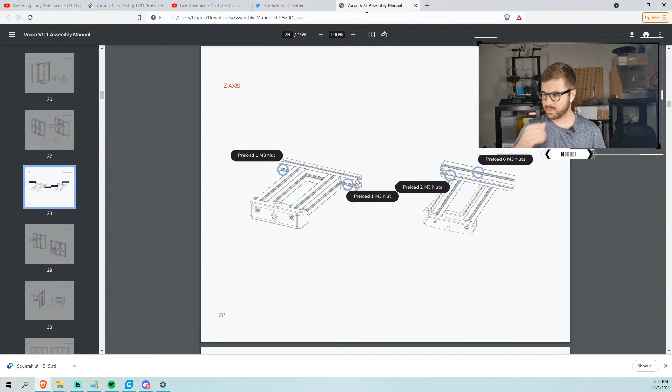All right, we should be good to go. So the portion we are on now is close to here, but not exactly there. So we're right here - we are going to be attaching basically the bed mounts to the Z linear rails. And I mentioned that it says apply thread locker. All I have is Loctite, and Loctite and ABS do not play nicely together, so we are going to skip that, which should be fine.

The bed or the Z doesn't really get a whole lot of momentum - it's moving very slow in comparison to everything else, so I don't foresee it being a huge deal. Worst case scenario, if we have to in the future, we can revisit this. Once this is fully built and assembled, we might be doing a mod to the bed where we're adding a belted Z instead of the lead screw. So at that point, we could come back when we disassemble and add that on. But for now, we are going to just attach. So we need the two printed parts, which we have out, and then M3x8 socket heads.

So let's go ahead and go to the side cam, and we will get these going. Let's see here. I'm gonna start off by just kind of trying to align everything nicely.

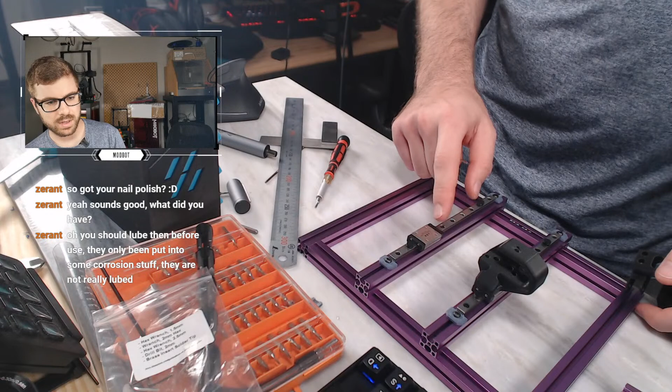It is much easier to do it now than take it off later. I'm going to lube them once it's all said and done. The instructions basically state that they use stainless steel linear rails, so they're much less prone to rusting, but they are good to go. Once this is all assembled, I'll go in with my fingers and get some lube, or I have some 3-in-1 oil I usually use a lot of, and that should do the trick. You definitely want to put something on them, because otherwise they can still corrode.

All right, so let's go ahead and get this other piece on.

What time is it where you're at, zerant?

This is the same one. So with this one too, you also need to drop the bolt into the hole. I'll show you that again. This one's trickier to get in. Let me see, I think I got it. Then you basically use the Allen key through this tiny little hole, and that's how you access the screw.

Knock on wood, so far so good, and I know we still have a lot. The rails are stainless, but the balls.

Gotcha, 11:40 p.m. I guess I would normally be up at 11:40 working on projects anyway. Are you normally up this late? I feel like I'm trying to get a little better as far as my scheduling goes with time, but it's pretty common for me to be up working on stuff until...

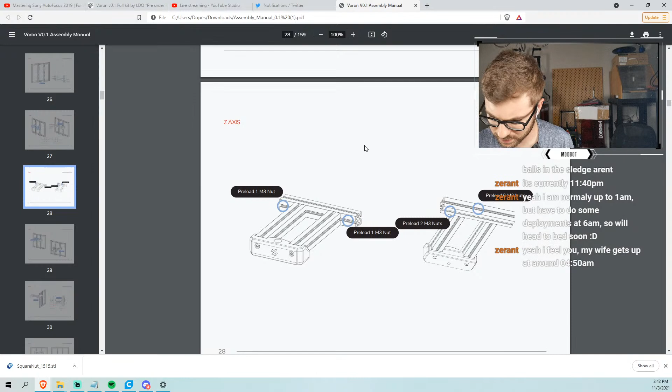Next, we need to do some preloading. I'll show this so anyone that wants to see it can. So we're gonna do one here and one here, M3 nuts.

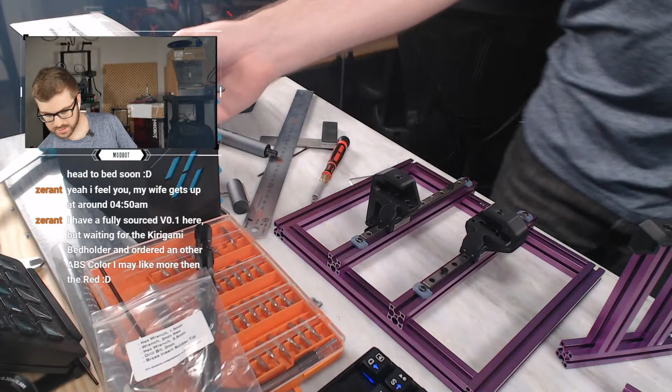Those kind of slide a little. It's funny, some of these nut traps are really loose and some of them are really tough to get sliding. Like this one's way tougher.

I have a fully sourced one, waiting for the Kirigami Bedholder. Oh nice, and I ordered another ABS color I may like more than the red. What's your plan, are you doing black as your primary and then a different color for the accent?

Okay, so we did one here and one here. Then on the back side, we need six here. So let's do it, it's a lot of nuts.

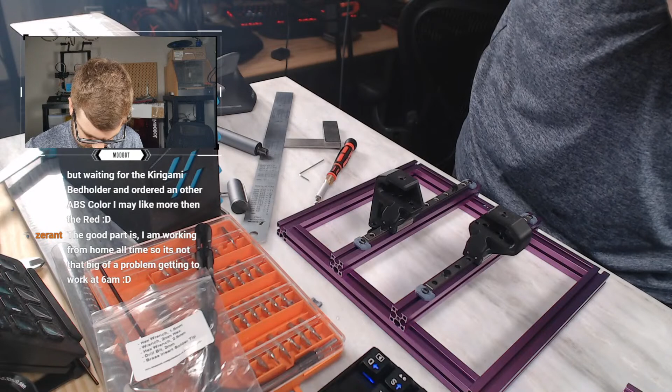The good part is I'm working from home all the time, so it's not that big of a problem getting to work. That's true. Yeah, when I was working and we went into lockdown over here.

Oh no, I broke it. Good thing I got a ton of them.

I loved working from home. I'm a fairly, I would say I'm definitely a people person, but I also just like being alone with my projects. The combination of doing all the YouTube stuff and working on projects kept me pretty happy. And so the idea of just being able to roll out of bed and start working is definitely nice.

I need to build one of these using Sparta's. Dude, Sparta 3D makes some of the most beautiful ABS I've ever seen. With how popular Vorons are now, I'm really surprised there's not more manufacturers making crazy colors for Voron builds. They're like the main one that I've seen.

Okay, so we loaded six in the back, and then we also need to do two down here on the bottom side, and the bottom side is where the small hole is. So you've got a big opening, and that's the top, and then the bottom side is right here, little opening. So we need to slide two nuts into here, and that should be it for the bed, I think.

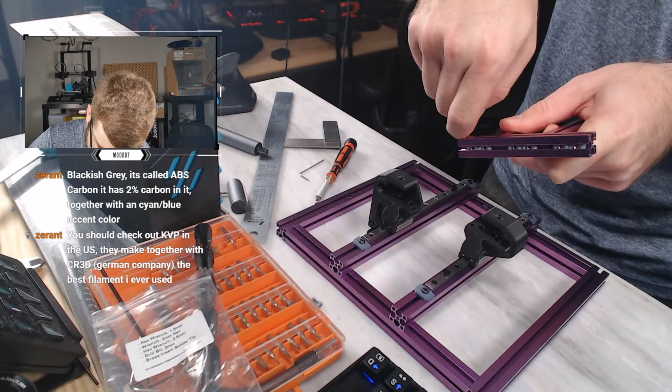Man, this is tight. Oh shit, I almost popped it out. Okay, so nothing fell out. So we've got, again, one, and camera angle, one, then we've got six in the back, and then we've got two in the bottom, and that should be everything.

Let's see, blackish gray, it's called ABS carbon. It has 2% carbon in it. Ooh, that sounds gorgeous. Yeah, this is just carbon ABS, but in black.

KVP I've actually used, they make together with CR3D the best filament I've ever used. I've used some KVP too, definitely anodized aluminum. You only get so many colors right now on the market. Yeah, that's true. LDO has quite a few different options for their kits, but it's still limited compared to the grand scheme of things.

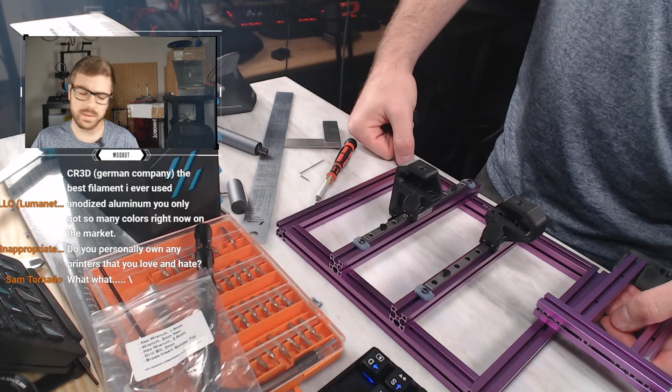Do I own any printers that I love and hate? I love my Voron. I mean, there's a lot of printers that I like, I guess. Like the Ender 3 was the stepping stone for me, between like, okay, these cheap printers can actually be pretty decent. I've got the FL Sun SR, which has been an awesome Delta printer, definitely my best experience with a Delta, that I will be installing Klipper on for a video just to see how fast we can push it speed-wise. I know that Teaching Tech already did the firmware, so the swap should be quite easy.

I'm trying to think what else. I mean, there's a lot of printers that I like, right? I've been using the CR-6 SE a lot, which I like. The Viper from Anycubic's been great, I like it. But love is a different thing to me, it's a little bit more, like I love the Voron 0.1 because I spent so much and put so much time into it, and it's such a unique printer. While many of the other printers on the market are great, and they check the majority of the boxes that one would want, it's still just another 3D printer, whether it performs well or not. Most of the printers lately that I've gotten or tested out on the channel have performed relatively well, where I'm like, yeah, this passes the test.

But yeah, when you say love, it has to be something special. For me, the Voron is probably the main one right now. Delta is really cool too. The Ender 3 I have with the Micro Swiss direct drive has also been really solid, I've done a lot of different filaments through that. That's a tough question, but the Biqu B1 has been awesome. I really like that printer a lot as well.

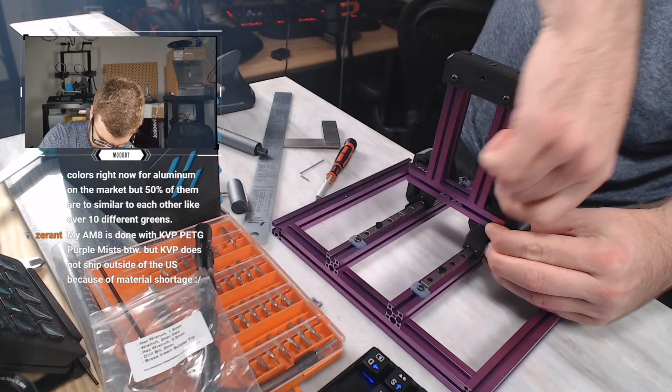All right, let's do that. Okay, so we are going to, hopefully nothing falls out. Oh yeah, okay, so that's what these nuts are for. We need to line these up. Let me see here. As long as you have them kind of lined up, you can stick your Allen key through and sort of move them depending on how freaking stuck they are. That one's good.

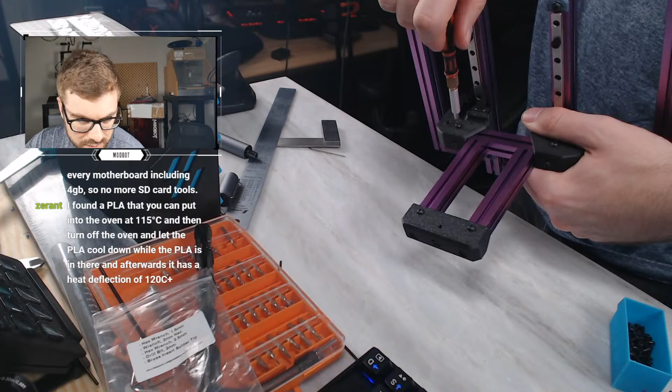I found a PLA that you can put in the oven at 115C and turn off the oven and let the PLA cool down. Yeah, so you can anneal PLA. The biggest issue, there's a lot of PLAs that you can actually do that with, but the biggest issue is warping. A lot of times they warp when you put them in the oven because they hit a certain temperature where it softens. So I've seen things like, okay, now we're going to install 1, 2, 3, which is in between this, and then 4 on this side. There's things you can do, like put it in kind of like a bowl with sand, and the sand should help keep everything compacted and in place. But I think the biggest issue is with the warping side of things.

Like I know Tom did a video where he printed with HTPLA from Protopasta, and he did an espresso cup and it worked, but the espresso cup definitely warped. It wouldn't be consistent enough. Yeah, even regular PLA can warp. Most thermoplastics, I believe, can be annealed.

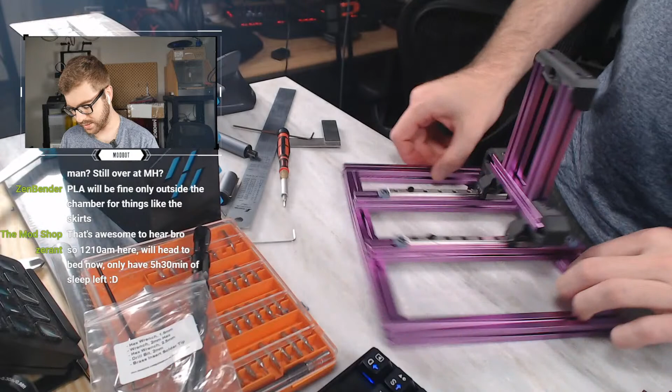PLA will be fine, only outside the chamber. Yeah, I think too, for kind of cosmetic things. Well, the bed is, I mean dude, the bed is sliding really, really well. Okay, preload nuts. Make sure the 2 preload nuts are located in the center.

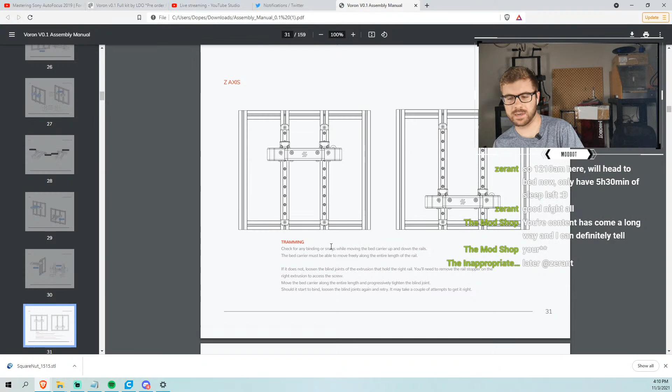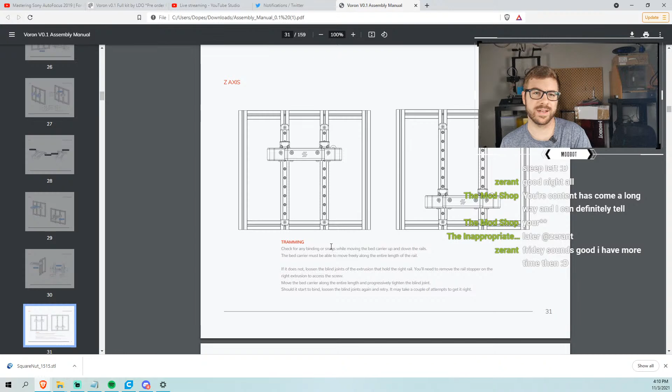Thanks, man. I've been little by little trying to make the content better and better. If I look at my content week to week, I don't see much difference, but year to year I can see it's come a really long way. The way I do things now is completely different. Before it was all off the cuff, and now everything is scripted to an extent. I type up everything for every video, like 3 or 4 pages, but I don't use a teleprompter. I basically look over at the next paragraph, get all the things in my head that I want to say, and then go for it. My personality is very ranty, which is cool for hangouts and streams like this, but for the sake of my videos on the main channel, I really wanted to tighten things up. Based on feedback I've gotten and the channel's growth, that's worked out. So I'm really thankful that there are people who come back, learn, watch stuff, and want to hang out. It's been crazy, man, a wild ride. I've been on YouTube for like 9 years now, so it's just crazy.

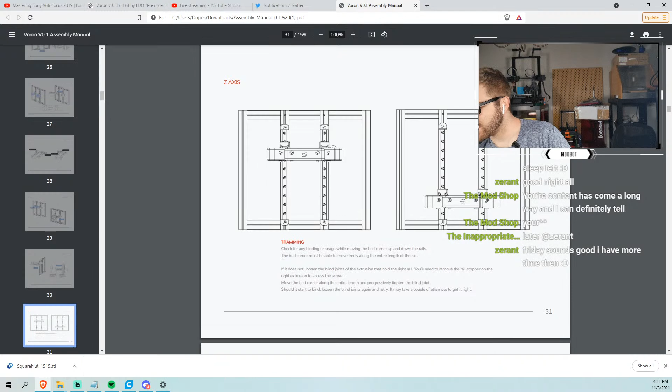Okay, so the next thing says tramming: check for any binding or snags while moving the bed carrier up and down the rails. The bed carrier must be able to move freely along the entire length of the rail. If it does not, loosen the blind joints of the extrusion that hold the right rail. You'll need to remove the rail stopper on the right extrusion to access the screw, yada yada yada.

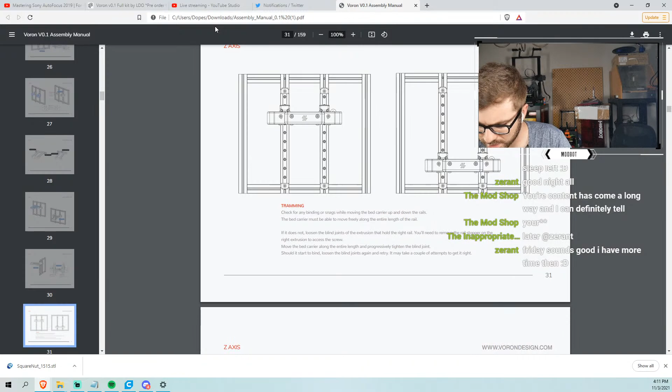I just realized I did something silly, I think. If it does not loosen the blind, bed carrier alignment. Okay, so yeah, I didn't tighten these completely because I knew I probably was going to have to tram this. But taking these little guys off now, be careful doing so, because if the linear rail pops off the end, that's no bueno. Basically I just want to move this up and down, and it's going freely because these are not tightened. So we're gonna go back.

We are going to go back to the page that tells me, so 58 millimeters again. We're gonna tighten up, let's see, 58. I actually need to slide the entire gantry now. Let's see.

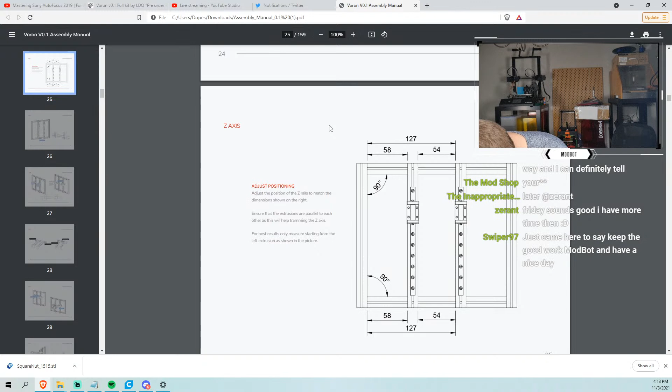Okay, we've got 58, let me show you guys this. So I got 58. Basically from the end of here to this inner lip, it needs to be 58 millimeters. So I've got that. Now I'm going to use this guy, insert it through the hole, and I'm going to tighten this completely now.

And then we are going to do the same for the bottom. So 58, which it is not even close actually. It's about 59. Pretty much right where we need it. Go here. Okay, 58 millimeters on the money.

But I goofed. Because I installed this little guy right here, the stopper, I have to take it off. I just got the steel ruler, it was actually a gift, man. So since I'm taking this off, if you are taking these off, be very careful because this can now pop off. I said earlier on stream that there's a couple things that you get, if you're a maker or into 3D printing, that you don't really know how you lived without, and that ruler is one of them.

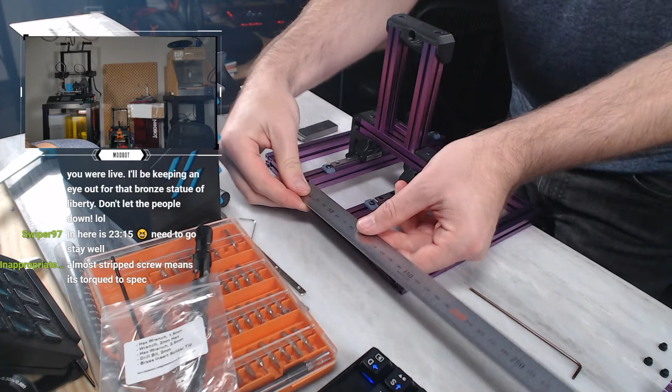Ooh, this is buttery smooth. That's what we like. All right, so we need 54 mil from one to the next. Let's see, which is not what we've got. It's like... yeah, they're both a little bit too far away. It's like 54 and a half. And this one is... I think that's pretty damn good. That is what we like to see.

Almost strip screw means torque to spec. Exactly.

Oh man, yeah, it's almost midnight there. Get some sleep, man. I'll be back on Friday, and we'll start streaming 4.5 hours earlier than it is right now, so that'll be 4.5 hours earlier than 7-ish your time, which is a lot better.

Okay, so we are tightening this guy. I know on these, because I'm not using... yeah, let's tighten it nice and tight. That's good. Ooh, yeah, that's nice. Okay, let's take off this guy so we can tighten the bottom side of this rail, and then we are done with this portion.

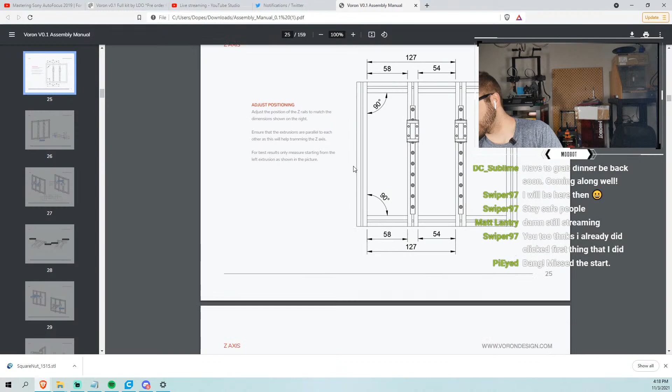Let's see, screen share. All right, so we've got the distances correct. We checked that there's 90 degrees. We installed the stoppers, we installed these portions, we preloaded everything, we attached everything, we mounted everything, we trammed everything. Now we are here, which...

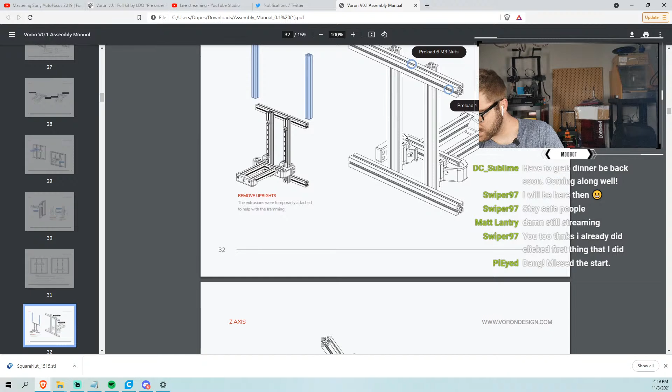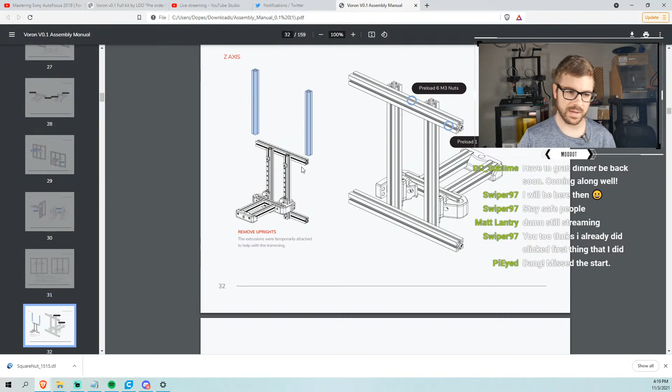Wait. Oh yeah, it says take these off. They were temporary, that threw me off. I was like, wait, why do we already have extrusions here? Okay, so these side extrusions, this one and this one, were only here to help us tram everything, and now that that's done, we need to remove them.

So I am going to... actually, let's use the long side to try not to strip these screws. So just 2 turns basically is all we need, and then it should be able to slide. Yes, excellent. And we will do the same for the other side.

Man, this makes me want to play. So a little side story while we're building this: like I said a moment ago, my channel, Modbot, used to be a video game hacking and modding channel, and part of that process, I fell in love again with retro cartridge games, pretty much everything from NES and up. So hearing this just makes me want to play some games.

Awesome, so this is good. We've got the side panels off.

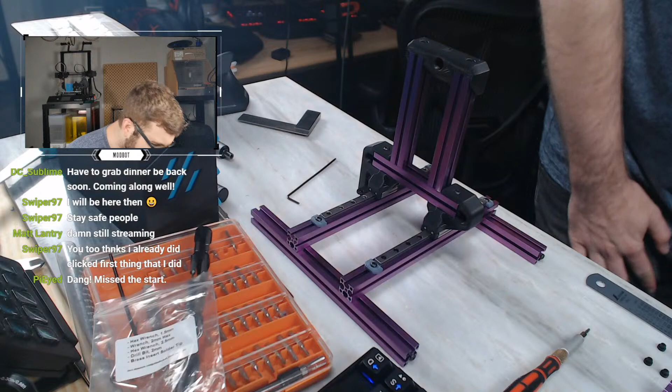Pi, what's going on? You too, thanks. I already clicked, first thing I did. Thanks, man, I appreciate it. Were you here earlier, Pi? I don't remember seeing you in chat. We started streaming actually like 4.5 hours ago, and then we streamed for a couple hours and had to take a break because I got hungry and the music wasn't working. And so we're back now, and the goal is to finish the frame.

So the next step shows we need to preload some more nuts. It looks like from the back side, like this, right? Yeah, we need to load 6 on the top and 1 in the back. So let's do the 1 first. Side view, so 1 in the back, which we'll go ahead and do now.

It's kind of loose, that should be okay. I just don't want it to slide out, that's my only concern if I tilt it, but yeah, it's still there. Okay, so 1 in the back and then 6 on the top.

Some of these are really difficult to get in, and I don't want to... the extrusion is tight, but I also don't want to put too much pressure on it. Man, there's a stuck one. Okay.

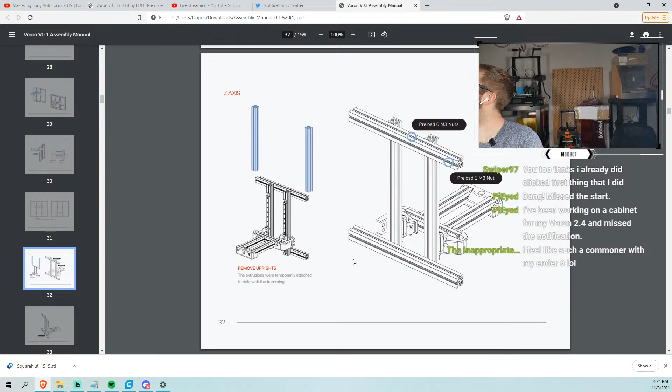We got all of those preloaded, which was this step. Take those off, we did. Preload those, we did. Preload 6 more, now on the bottom. So on this side, definitely don't want to miss any of these. I think Aaron's home. Maybe. Okay, so we did 6 on top, 1 on back, and now we need 6 on bottom, side.

I actually am, I'd love to test out an Ender 6. I have the Ender 7 sitting right over here in a box that I need to test out, but I'm also testing out a few other printers at the exact same time. So it's kind of on the back burner. But I had quite a few requests to test out the Ender 7, so I was very happy. It wasn't Creality that actually sent it to me. It was a seller, like just someone that resells them.

But I am looking forward to see what it's all about, because it is a Core XY. They do claim it has fast speeds. It's linear rail, or it has linear rails. I think it's Bowden. Yeah, that printer I'd like to test out, but then also install Klipper on it and just see how fast it can actually go compared to what they're claiming, which I think is like 250 millimeters a second.

You guys can see this, just making sure. Come on! Oh my God. All right, I'm gonna get a different angle. I'll show you guys after. This is ridiculous. Oh, there we go. You guys can see like that. What am I doing? This is way better.

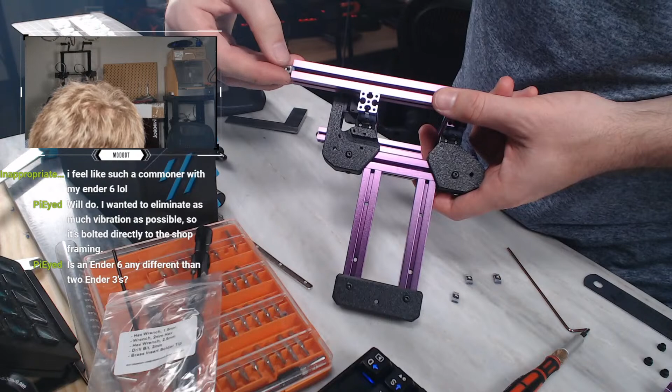Oh, there's so much crap around me. I hit my head on the overhead camera. We're gonna try to do the same thing where I'm gonna put 2 of them. Oh, Jesus.

Some of these nut traps are super loose and some of them are really tight. Okay, this one's loose, or at least this one's exactly how I want it, where it moves a lot easier, but some of them are really stuck. So we're gonna do the same thing, which is basically 2 in the center and then 2 towards each edge. Cool, cool, all right, easy.

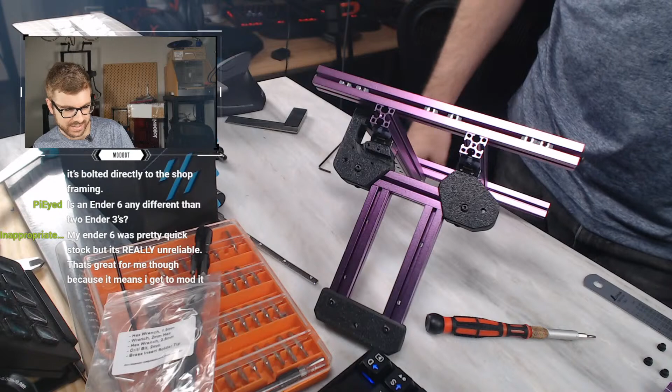Is Ender 6 any different than 2 Ender 3s? Ender 6 was pretty quick stock, but it's really unreliable.

That's great for me though, because it means I get to mod it. I think that was like finding 3D printing, because when I found 3D printing, I was heavily in the PC modding stuff still. And so finding it was like, cool, now I can make custom case mods and custom fan shrouds and stuff. But then I got obsessed with modding 3D printers and all that came along with them. So yeah, 3D printing just clicked, it checked all the boxes. And because there's so many different machines and so many different filaments and firmware stuff and slicer stuff, it's just like I can't get bored of it. If all of a sudden I'm like, okay, well this is the same kind of printer over and over again, well I'm like, let's play around with firmware now, or let's play around with different filaments. So I love there's just so much. And then also it's just awesome.

Also, it's just awesome, all the crazy cool things people are doing with 3D printers. I love it, whether it's just fun hobby stuff or professional stuff for work, whatever, it's awesome.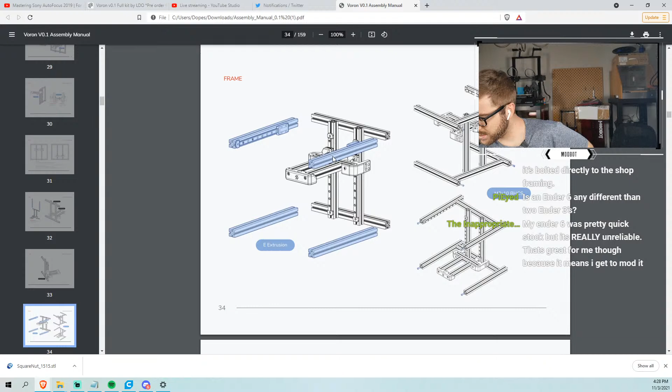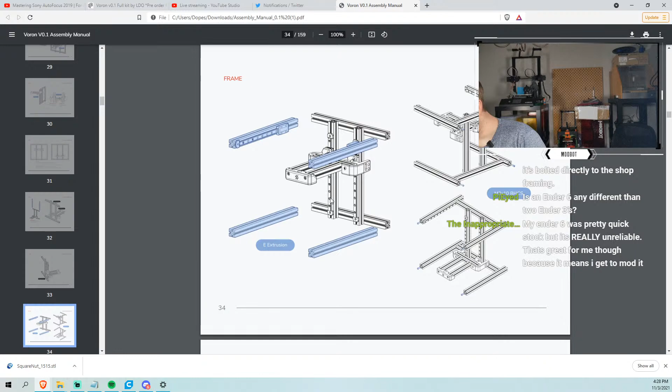Okay, so we did all the preloading, which was basically preload up here, preload down here, and now it's telling us to get E extrusions as well as these, which must be our linear rails from earlier. Yeah, these guys, which are the Y extrusions, or the Y linear rails. So let's go ahead and put these here. And then E, what do the E's look like? That's probably not the most effective way. Okay, so E's have one hole only, which I think are these guys. Yeah.

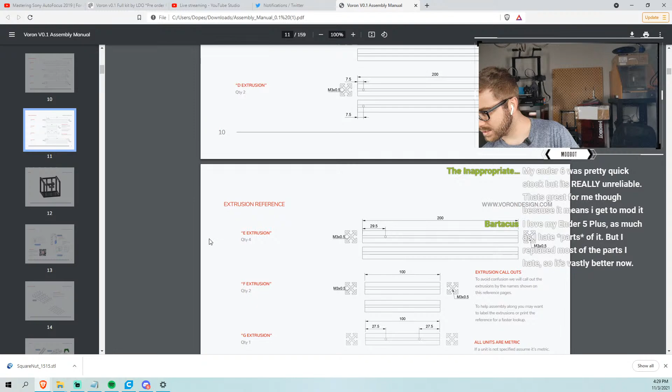I've had two Ender 5 Pluses that I had to get rid of just due to space constraints. They just take up way too much space in here. I talk about it all the time, but this is a tiny little one-bedroom condo, and it's me, a big lab pit dog, a smaller mixed dog, and then Erin. So I have to have a use for a printer or figure out how to make it work, which is why I've been trying to work with height as much as possible. But I really did like the Ender 5 Pluses I've gotten through. Yes, again, like you said, there's room for improvement, like with most of the lower cost 3D printers, but as a base platform, it's fairly solid in my opinion. I definitely don't mind the Ender 5 Plus.

Ooh, we are not that far, but we are getting close to that. Okay, so this is showing to slide. So I'm imagining, let's see, so this is the bottom, right? Yep.

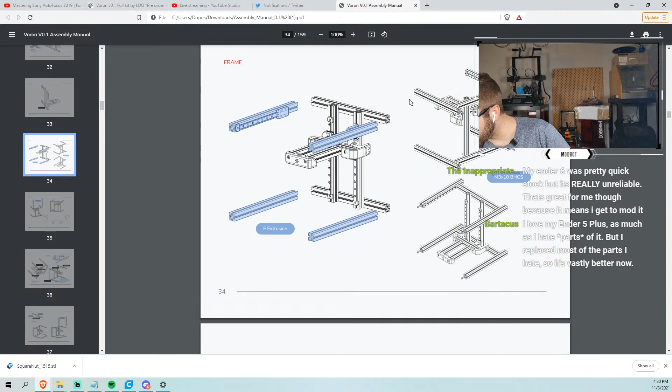Okay, so let's go ahead and slide. I don't know, it doesn't really tell me how far they need to be sticking out the backside. Like right here, they're all sticking out. So okay, let's go ahead and do this side. And then these holes, oh, that's okay, it makes sense now. These holes need to align with these screws. So we're just going to slide this guy, and then we are going to slide this guy. Okay, let me try tightening these down.

Let's see. And then I'm going to use the little, where's my machine? There it is. No, my square doesn't fit. Oh, I should be able to check the backside. Yeah, it looks pretty damn square to me.

Yep, Erin's home. Debating on muting my mic for a second when she walks in the door. I did text her saying I will be streaming when you get home. Yeah, let me, I'm gonna mute my mic just for, well, once she walks in the door, I will mute it for a second.

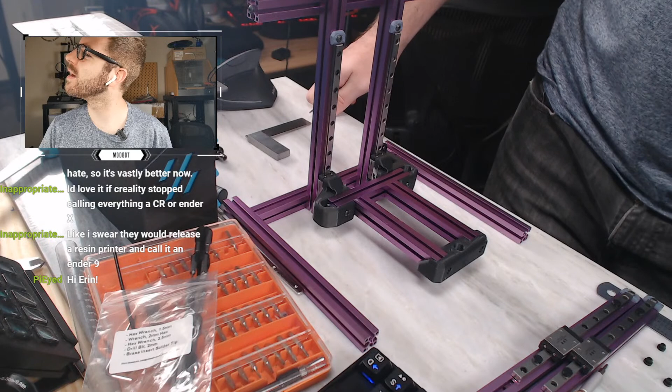I love it if Creality stopped calling everything a CR or an Ender. It makes no sense. I thought for a while that made sense, but their naming conventions make no sense.

Let me see if she texts me. Maybe she's like, I'm coming in. Oh no, she just said be home soon. I don't know if...

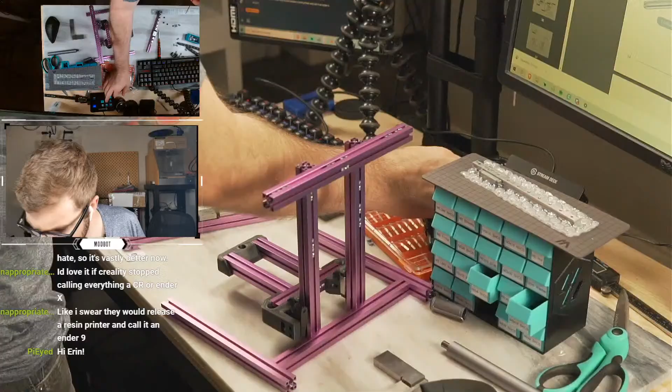Oh, you guys can't even see what I'm doing. Let's change cameras. Unbox. So these I'm not squaring right now, I'm just going to kind of loosely put them on because they're just dangling in midair. I will square them though, eventually.

It's starting to look like a thing, guys.

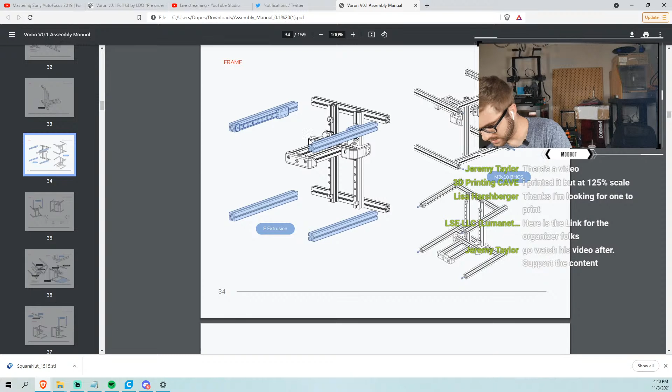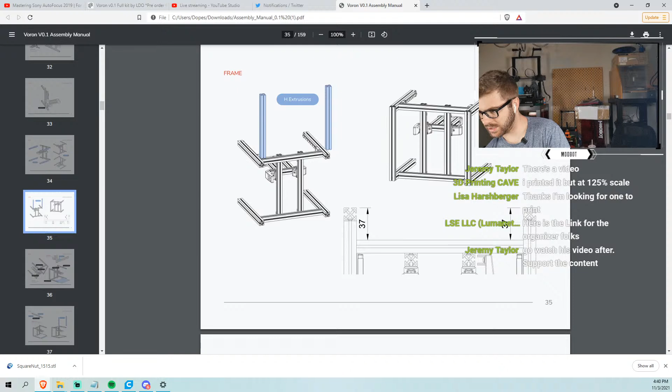All right, so we've got all of these in, we've got the M3x10s in place. Now it's time to, okay cool, this is where we are going to install the H extrusions. What do the H extrusions look like? H, okay, so H has the holes on the outside, so those are going to be these guys. H, yep, okay.

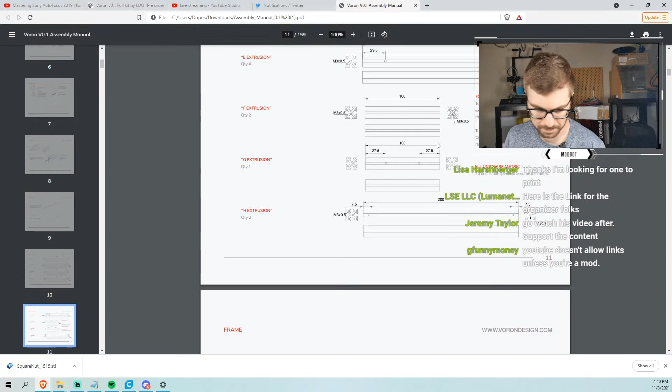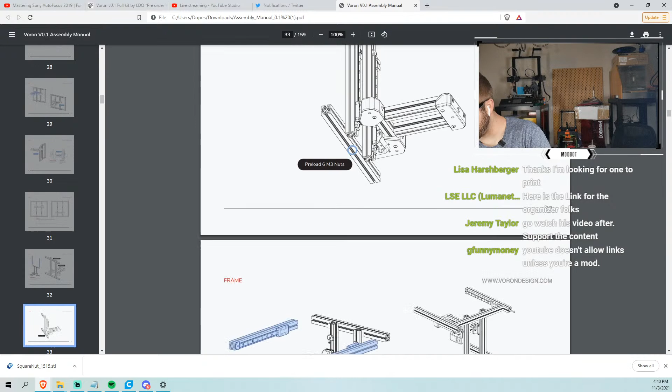Dogs are so excited that she's home. I'm like chop liver, which I get. I'm not nearly as fun as Aaron is.

Okay, cool. So now we are going to drop these on the back and tighten everything. It says it should be okay, so let's do this. Let's go unbox view so you guys can see the top as well.

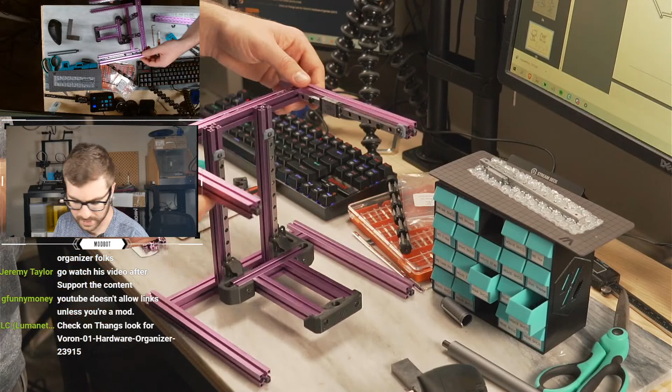Yeah, I can also try to remember to post a link in the chat or in the video description later on. Okay, so we are just going to slide these guys over the screws that we just put on and then tighten them in place.

I am going to use this little level, or square, to make sure everything is square before tightening it. I'm actually going to get down. Super nice, I got this foam flooring now. Oh wow, these are actually helping to square it because it's kind of pushing up against it.

That is not perfectly square. That needs to go down. Oh, that's actually okay.

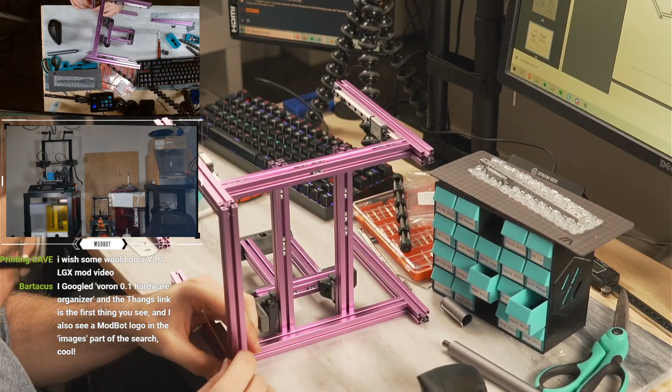Does Aaron feed them? Who'd you say feeds the dogs more, me or you? Me. Oh, she said me. Yeah, she feeds them more. She usually comes home, she's like, did you feed the dogs? I'm like... I know.

All right, let's rinse and repeat.

LGX mod video, the Bondtech LGX? And what do you mean, like installing it on what? And there goes the gang.

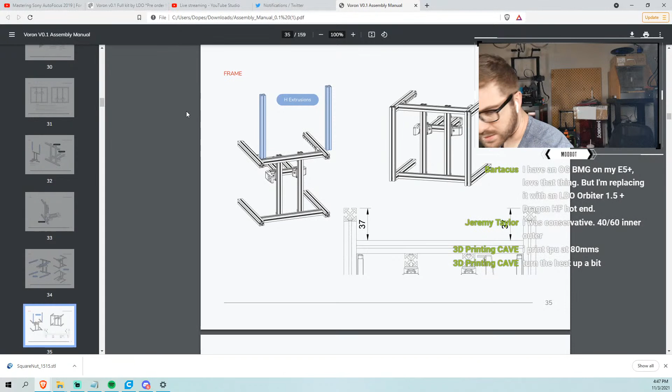It's interesting, there's a little bit of wobble, but I think that once I get the front portion on, it will resolve that. It says it should be 37 millimeters. Let's measure. It's 36 and a half.

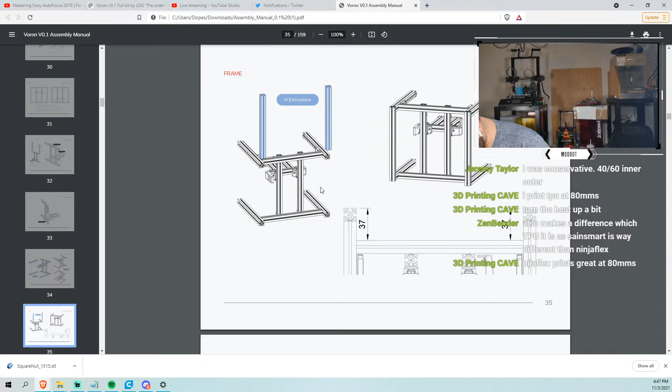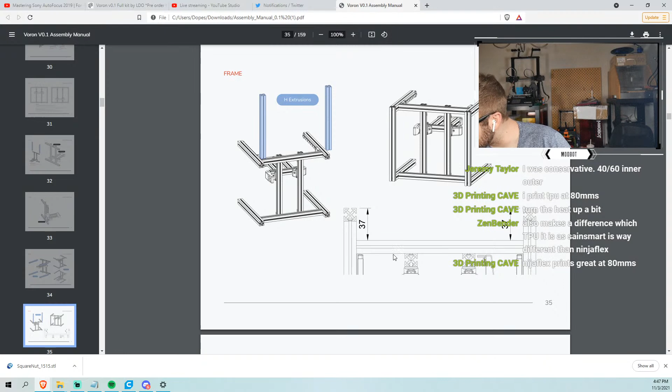This one is 37. That could be why there's a little bit of... we're gonna leave it as is for a minute here and get the other portion on. So that's done. Oh yeah, we gotta preload a ton.

Ninjaflex prints great at 80 millimeters a second. That's on the... oh damn, okay, turn the heat up a bit. It also makes a difference on which TPU it is, as SainSmart is way different than Ninjaflex.

Yeah, Ninjaflex should be softer, I think. I don't think that, other than their chinchilla material and one other company, I don't think there's much that's softer, because Ninjaflex is, I think, 85A shore hardness, and most of the stuff I've seen other than that's like 90 or 95. Ninjaflex is tough, definitely have had mixed results with it.

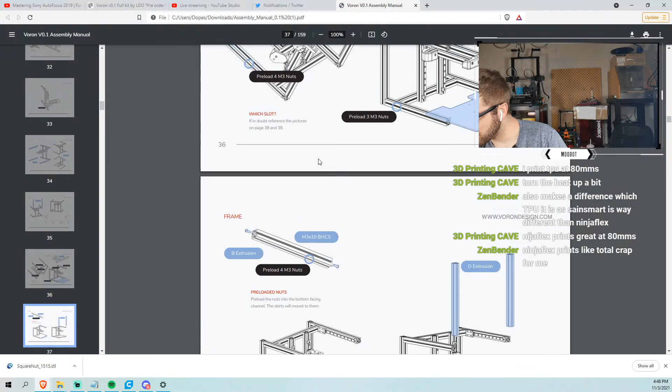Okay, so we need to do some things here, which are basically lots of preloading. Let's switch to side view. Okay, so this is the bottom, and we are going to be loading 4 and 4. Let's start with that.

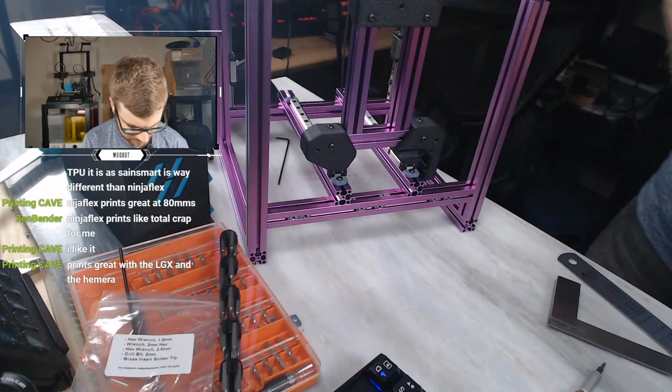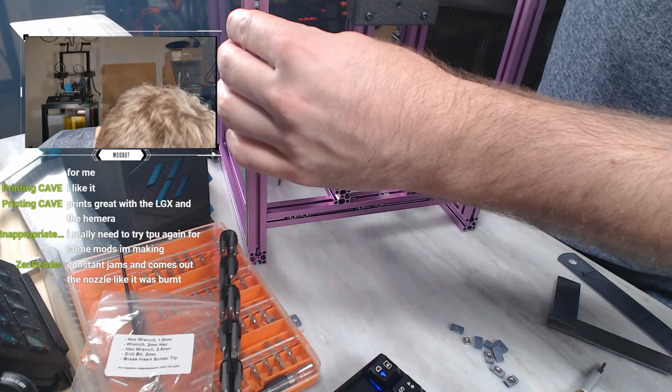Get in there. Dude, some of these are so freaking tough. Yeah, that is a lot of wobble. I'll probably loosen it, get it all assembled, but I might end up playing around with the frame as far as the squaring of it goes after the stream, just to make sure everything is aligned correctly.

How many on the bottom? I said preload 4. And 4, okay.

Dude. Yeah, I'm not sweating at all. Constant jams and comes out the nozzle.

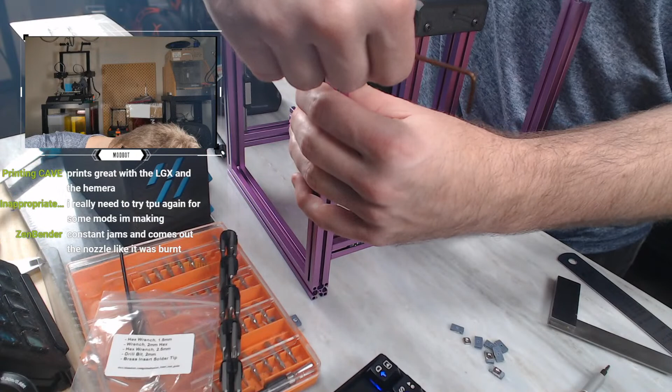I really need to try TPU again for some mods I'm making. TPU is a really cool material. The main things I've used it for are like phone cases, shock absorbers, and feet for things that need to have some form of grip. Although not all TPU is very grippy, there's some that's quite slippery.

Come on, there we go. Okay, we got 4 there.

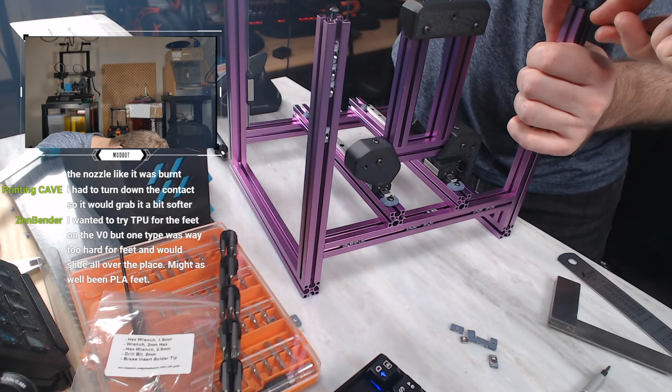I didn't even print these with a brim yet. There's like... Jesus. God. Okay, well, those are definitely not going anywhere.

Gosh, the complete opposite from if you don't have these - there we go, that one slid in. Wait, yeah, 4. 1, 2, 3, 4. Okay.

Easy, easy. Okay, so we've got 4, 4, and then it says on this side - so if you're looking at the bed, the right side of the machine, we need to do 3 on the side. So there should be 4 and then 3.

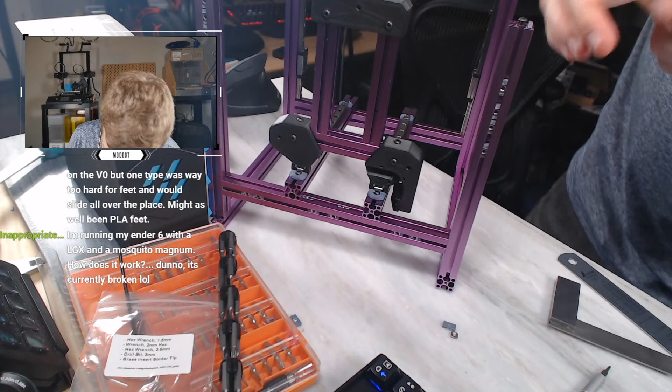Well, that one went right in. Okay, so that's those ones. And then we need it looks like 3 on top.

So let me show you guys a different camera angle. So this is the top. So 3 up here and 3 up here. And then 3 on the other side. So we just did 3 on this side. Now let's do 3 on this side.

Quadruple check this page because this is the page where you're preloading a ton of stuff before you seal the frame. So take your time and make sure you're doing this stuff right. Let me tilt it at an angle. Trying to not put any downward pressure because it's not supported.

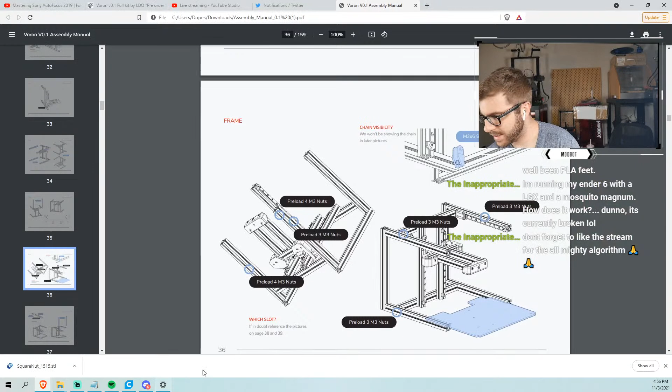Okay, so we got 4 on the bottom, we did 4 on the bottom, we did 3 on that side, we did 3 on the opposite side, 3 on top and 3 on top, which is great. And then it says we need to also install 1 chain link on the inside bottom, which I did not do the first time I built this. Let's not forget that.

It's probably gonna be easiest to do it from this camera. Okay, so we're gonna tilt it on its side, and then we are going to feed one of these down here. Like that.

All right, let's just go in. And then we are going to grab the opposite chain link, which should, yes.

It's this little - well, I'll show you guys right here, I guess. So it's this one on the very end. Not the - we should have already used the other one, but to confirm that this is the correct one, I can show you guys in a second, if I can get this off.

Nope. Come on. Why you gotta be like that, man? I did it, I did it.

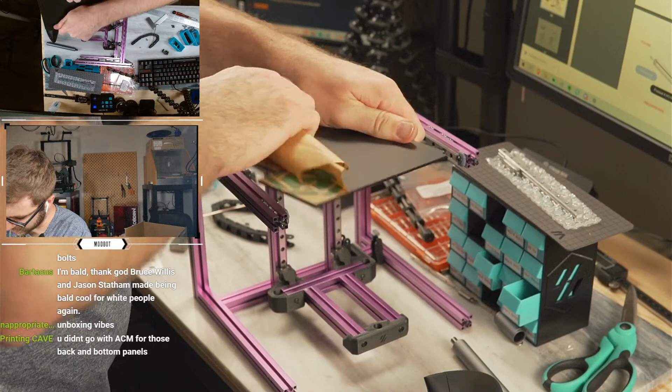Oh man, I almost got it. Huh, this is different, I think the one I previously used was glossy. Well, this is matte, and my sweaty hands are rubbing off on it. Let's see, throw this on the ground for now.

ASMR peeling. You didn't go with ACM for those back and bottom panels. You didn't go with...

I'm bald, thank God Bruce Willis made being bald cool for white people again. Gosh, what was I going to say? He totally threw me off with that comment.

I don't know, I think these are not ACM panels. They look like acrylic, but matte, so I'm not entirely sure actually. I think on the one I ordered initially, or the one I self-sourced, they were ACM panels.

All right, sorry guys, no ASMR here, just aggressive tearing. Yeah, these feel kind of like acrylic, and they're glossy. Like when I look on the sides where the cuts were made, they're kind of glossy, but the top and bottom are very matte.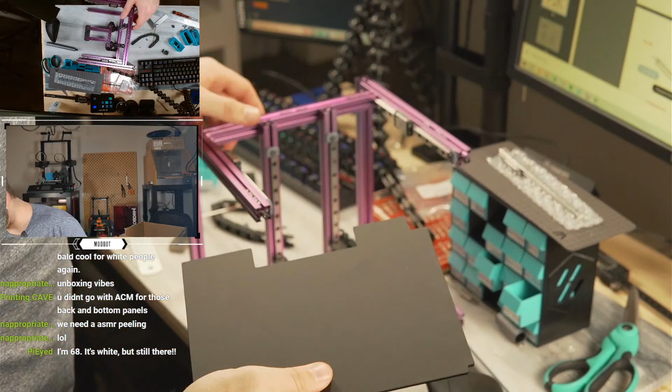Okay, so next we are going to be sliding this into the bottom extrusions, but make sure that this portion, well, you'll only be able to slide it one way. This is where the cable chain we just installed has its gap. So we should just slide it nice and in. Yeah, it looks good. All right, next it is time to duel.

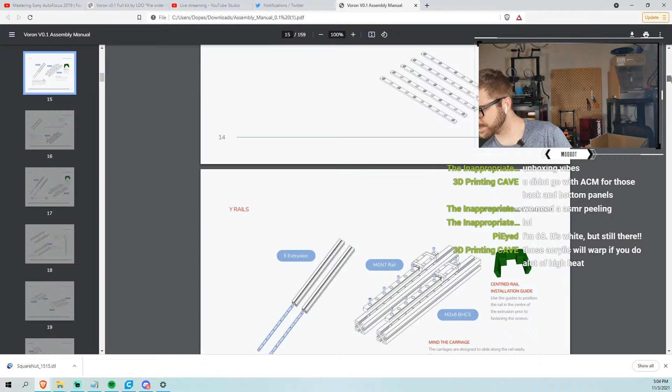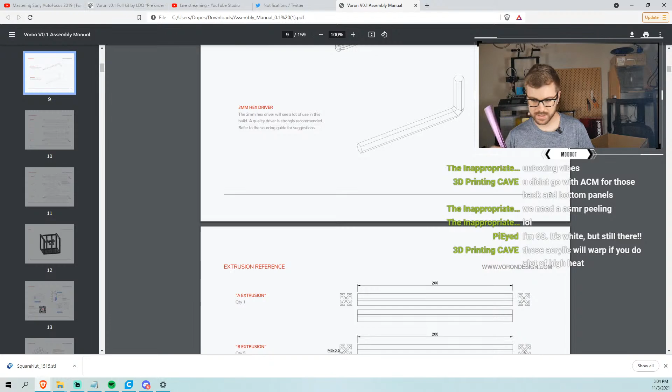Now we need to get the B extrusion and D extrusion. So let's figure out what the hell those are, because I don't remember. B extrusion is going to be the one with nothing as far as holes go, this guy. And then D extrusion must be the one with holes, because we'll need that, yes. This is the D extrusion. Did I screw up?

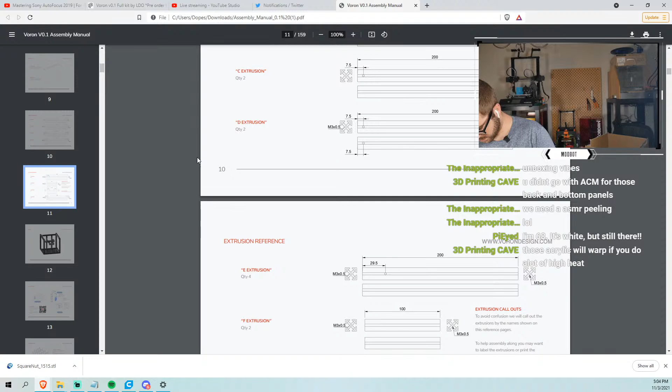No, I did not, thank you. I was worried that I might have used the wrong extrusion for a part.

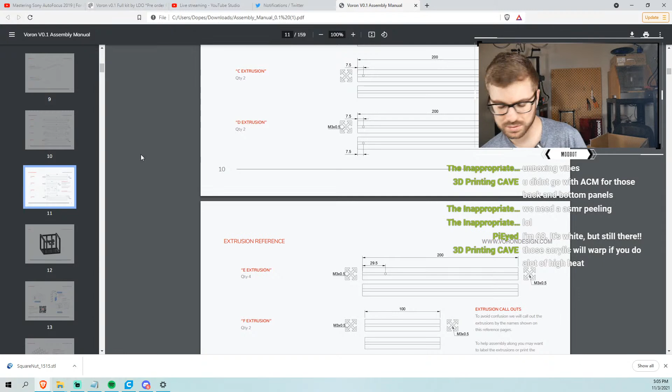Those acrylic will warp if you do a lot of high heat. Interesting, huh. Well, I guess I'll have to keep a lookout. It shouldn't affect the structure of it though, right? It'd be more just like, it wouldn't look as nice if it was slightly bowed, but I don't think those thin acrylic really add much as far as the structural integrity of it.

Okay, so we are done with that. Look at us go, like 40 pages in.

Okay, so we need to take the B extrusion, which is the bottom extrusion. Let's go on box cam. We need to load 4 nuts into it, which will be on the bottom. So let's go ahead and grab 4 of these guys. One.

I wonder how DC's build is going. I know you said you had to run to dinner. Right, I don't want anything to just look bad. Gotcha, okay, I guess we'll play it by ear then.

Since it is on the bottom, I don't know how noticeable it would be. That is something to consider then, I guess, that the panels are not ACM panels.

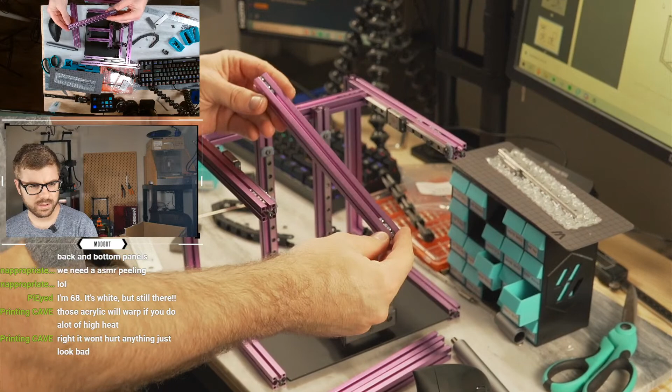Okay, so we've got 4 of these, and then we need to add M3 by 10s to the end. So let's go M3 by 10. Here we go.

I feel like it's a bigger deal on the larger Vorons, I'm brain farting, it's been a long day. I feel like it's a bigger deal on the larger Vorons just because there's more panels, so the warping would be, you know, exaggerated or amplified, if you will. That's probably the more appropriate word.

I think this just slides in. Yeah, we're just gonna slide. Wait a minute, I feel like I have that up.

If the B extrusion has no way of tightening... oh, no, that's right, okay. All right, so this slides, make sure the preloaded nuts are on the bottom, and then this will just slide right into the middle, like so.

Probably need to tighten these a little bit more. Yeah, I'm gonna screw these a little more.

How frequent are you going to be streaming this build? My kit should arrive this weekend. It'll be good for another reference with Nero's.

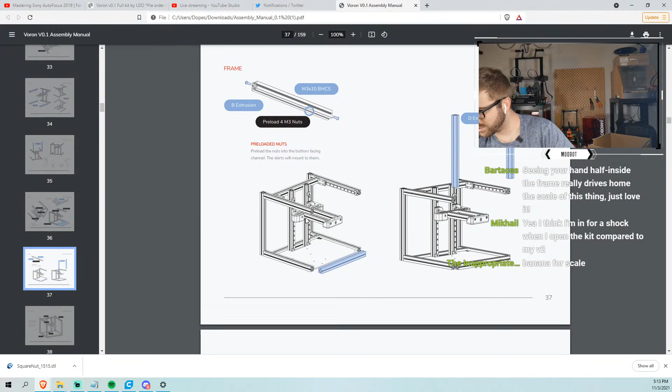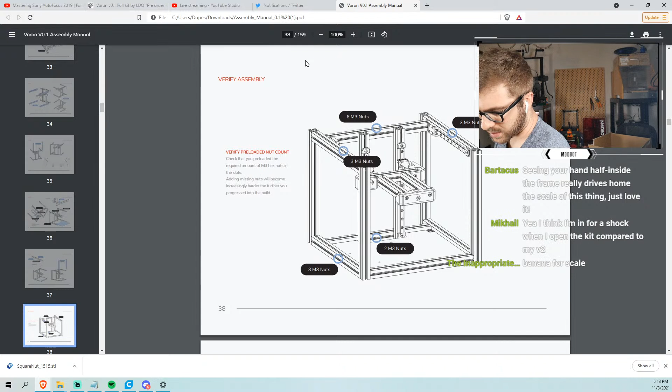I think we're just about done with the frame. Let's see, okay, it wants us to check our work. So there should be 6, let's just see. So 6 on the top. I'm gonna just jump back and forth. So 6, we've got 1, 2, 3, 4, 5, 6. And there should be 3 on each side. 1, 2, 3, 1, 2, 3. Then it's saying there should be 3 on the bottom side, which we've got. 2 in the back, which it's very difficult to see. There we go, maybe right there you can see it. That's for the Z motor, which we have those there, which is great. And then, oh my God, there's so much to reference.

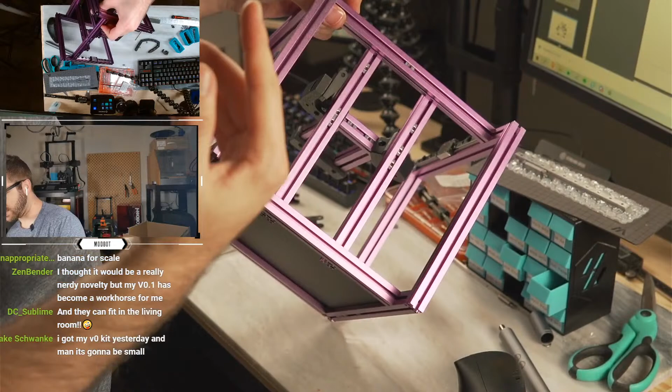Okay, let's flip it from this angle now. We should have 4 here, 4 here, 4 here, 6 here, 3 here, 3 here, 1 here, 4 here we checked, 3 here we checked. We're good, we're looking good, we're looking so good.

Oh man, you gotta print the parts. Well, you don't have to, you could print out just the actual parts you need that aren't the cosmetic ones, like the panels, the skirts, the top hat, because I haven't even done the panels or the top hat yet. It's not that many parts. You could print out those, you just need the filament, and they can fit in the living room. DC gets it, that'd be a novelty.

My V0 has become a workhorse for me. Yeah, like when I need just a small part, or I'm trying to quickly prototype something and just want to do a fit test, I print out that portion on the Voron because I just know it's gonna work, it's gonna print quickly, and it's piece of cake. I'm not shocked at the usefulness of these things if you think about it, most functional parts a lot of us print are small.

Yeah, they did a survey or something like that with Cura, where Cura or Ultimaker stated that the majority - I can't remember the percent - it's a huge percent of 3D printed parts, the most common size is about the size of a fist, which is basically what this is as far as the build plate goes. There's a couple exceptions like this organizer, and some things I've printed are bigger, but I'd say most all of the things I've truthfully designed for functional printing has been within close to this build volume. Not all, but a lot of the bigger stuff is fun stuff, which is totally fine, and I love printing fun stuff. But as far as a prototyping/functional printing beast that can print in a wide range of materials, yeah, it's really solid.

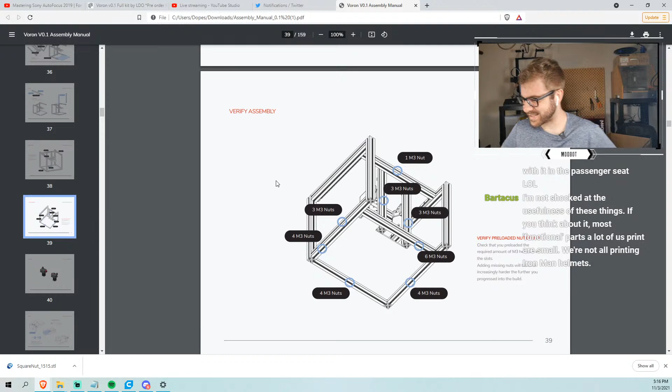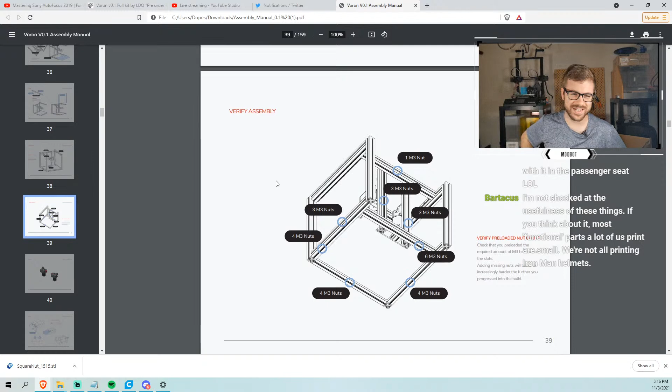So how long did that take us? We started streaming at 12, cut it at 2:30 which was 2.5 hours, then came back at 3:30, so 3.5, 4 hours and 15 minutes total. I thought it was going to take 2 to 3 hours, so a little bit longer, but the frame is done.

So let's take another look at this. The frame is here, it's looking adorable, and the purple looks absolutely amazing. This was without a doubt the...

Most, other than the length of time it took, the most smooth portion that I could imagine. I wasn't sure what was going to happen. The first build took me forever off stream, like forever. So not only am I attempting to build it now, but on stream while talking and doing things. This, knock on wood, because we still have a long way to go, but I'm very pleased with what we got done today.

So just so you guys know, between now and Friday, which will be the next stream, I will schedule the event—probably schedule the live stream tonight. So if anyone wants to set a reminder or make sure they get their timing correctly, I will schedule it tonight. I'll play around with the frame to see if I can get rid of that wobble completely, because I did use my square, but obviously something is slightly off. So I'm going to loosen things, see if I can get that fixed up, clean up, and then take out all the parts we'll need.

So AB drive is next, we should definitely get through AB drive no problem. AB idler is after that, then Z-axis. I think my goal for Friday is going to be to get at least through Z-axis, possibly X-axis, and that's probably where I'll stop.